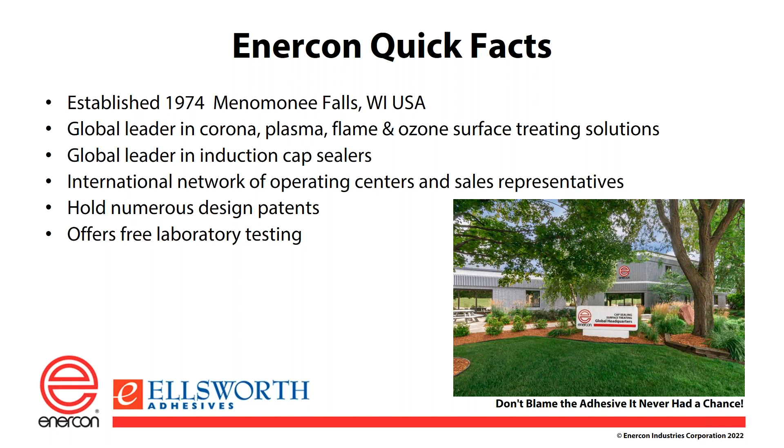Now I'll hand the presentation over to Don, who will tell us a little bit about Resin Lab, and then Bonnie will get the presentation started with the principles and fundamentals of adhesion.

Well, good morning. My name is Don Giroux. I work in product development for Resin Lab. I work in Dr. Bonnie Ludwig's group. And I'm going to tell you a little bit about Resin Lab. Resin Lab is part of the Ellsworth family of companies, and we have this specific responsibility towards the adhesive distribution group to provide technical support.

In the late 1980s, Ellsworth was a growing concern who had a very capable group of science or technical related people in their sales force, but they had a deficiency. They had very little experience relative to the chemistries of the products they were selling. So they went out and they found a talented young chemist by the name of Paul Tien. They brought him into their group. They gave him 1,000 square feet of space, 2 mixers and a technician, and I would argue that was the birth of Resin Lab. Now fast forward to today, we have over 106,000 square feet.

We have 50 plus employees. Dr. Bonnie Ludwig's group consists of a group of highly trained chemists, scientists, and technicians, and we have a state-of-the-art laboratory. But despite all this growth, we remain the same company that Paul Tien helped us start in the beginning, where we are responsible mostly for the technical support of the Ellsworth sales group and their customers.

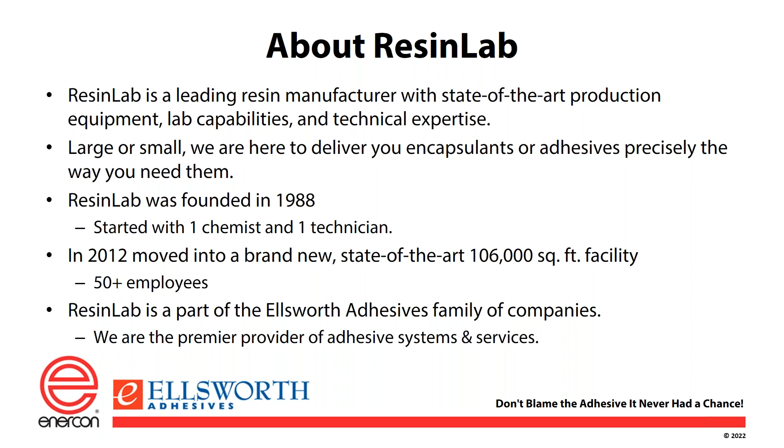Ellsworth, as an organization, has a commitment to quality. We have systems in place to hold us accountable to that commitment, and systems in place to organize our documents and our work. We also have a culture of continuous improvement, and we take that very seriously.

Resin Lab services are focused mainly on custom formulations. A customer would come in with a specific need, and we would create a formula that works exactly how it needs to in their application. We also do modifications of our own and other companies' products, something as simple as a change in color or adding spacer beads, to things that are more complex. We do toll blending, where a customer comes in with their own formula and uses our facilities to manufacture that product. And inside our building, we have custom packaging as well.

Moving on to the principles of adhesion.

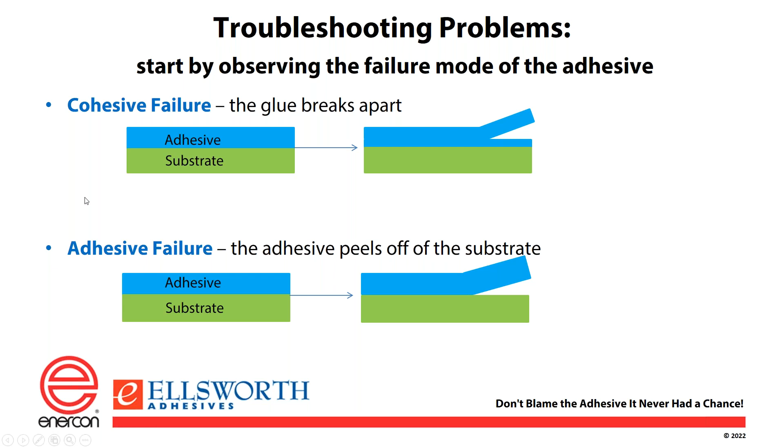As you go through the process of selecting an adhesive, you want to think holistically about your application, how you want your process to work, how you're going to take that adhesive and convert it from a liquid format to a solid format, and what you want those properties to be after it's hardened and in your application as an adhesive. Sometimes when we work with customers, they're really focused on the post-cure piece, which is the performance in the application. Really, the process pieces are just as important as the performance in the application, and include concerns in terms of how fast your process is going to work, health and safety, and convenience for your operators.

We're going to talk a little bit about common chemistries of adhesives, and this is going to be rather brief. We've got one slide that shows a whole bunch of stuff, and what I want you to take away from this slide is that there are really three main components. The first is to look at your substrates, that's your symbol key over on the left. Directly below that, we have characteristics, so how does the adhesive behave before cure, during cure, and after cure? And then over on the right, we have some typical adhesive types.

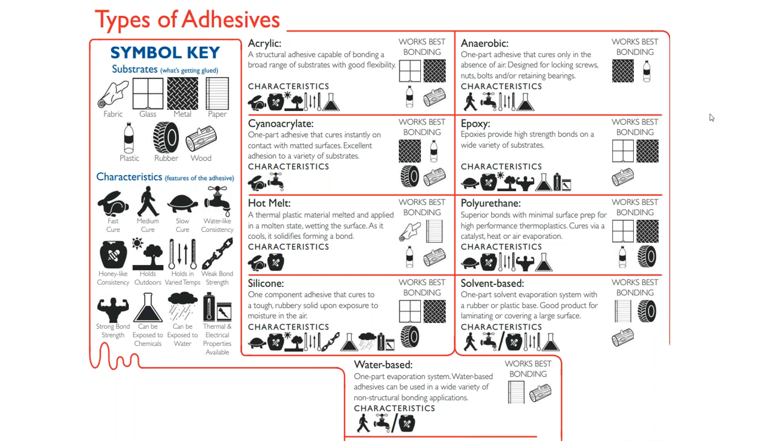Moving on to what adhesive failures reveal. Your first step is to examine the mode of failure. You may remember from a previous slide, we have two main modes of failure: adhesive failure and cohesive failure.

In adhesive failure, the adhesive will separate cleanly from the substrate. So the adhesive itself is intact, but it is no longer stuck to the thing you tried to glue it to. In that case, the bond between the substrate and the adhesive needs to be improved.

For cohesive failure, the adhesive itself breaks apart, but it does remain bonded to the substrate. In that case, the adhesive type may need to be changed, chosen to be stronger or tougher or more elastic, depending on how much strength you need in that bond.

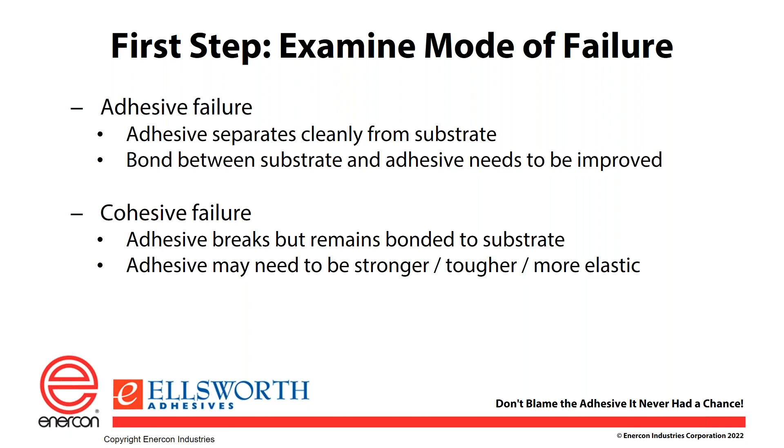If your failure mode is cohesive, that means your adhesive doesn't have the needed mechanical properties for your assembly to do what it needs to do. You may need to modify the hardness, flexibility, elasticity, strength, toughness, and more. You may also have had an issue applying the material, such as not mixing a two-part system properly, or not applying enough energy or time to allow it to harden completely.

Another common reason for cohesive failure is that the adhesive itself is fine, but the environment of use creates changes to the material, such as wide swings in temperature, pressure, humidity, moisture, contact with water, or other chemicals. For instance, in an automotive application, the material may be subject to greases, fuel, or UV exposure. Depending on the adhesive you choose, all of these may compromise its performance. So up front, you want to know the environment of use and select the adhesive based on how robust it needs to be.

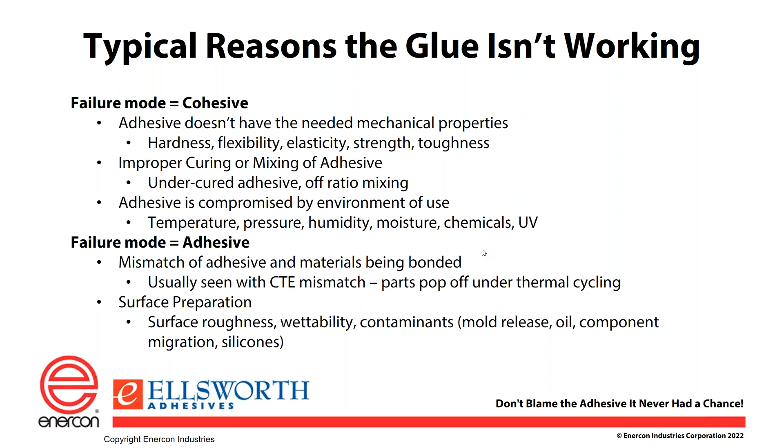If you want to try to predict how your adhesive will perform, you can do some adhesion testing. Typical adhesive tests are lap shear testing, pictured to the right, where two parts are bonded together with a half-inch overlap and pulled apart by a universal tester, giving you a force in pounds per square inch. You can choose the substrate base to match your assembly and predict both the strength of the bond and the typical mode of failure. Other tests exist, even more beyond what's on this list.

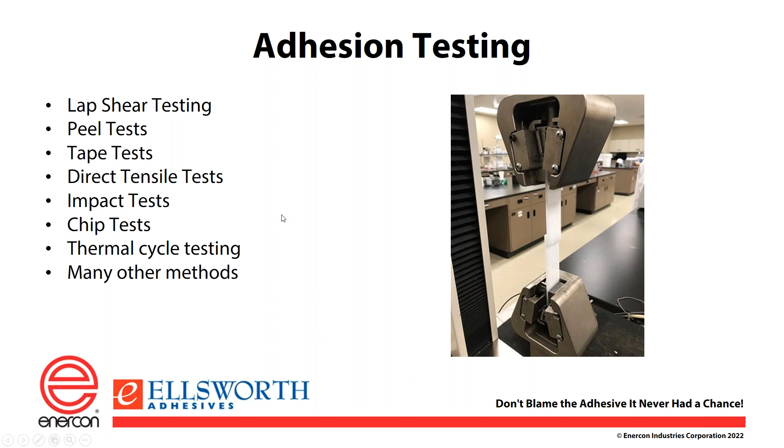Adhesion testing isn't a cure-all. It will be predictive of performance, but ultimately what your assembly is made of, how it is put together, and how you use it need to be examined to ensure that your adhesive choice and process are the best choice to get the performance you need.

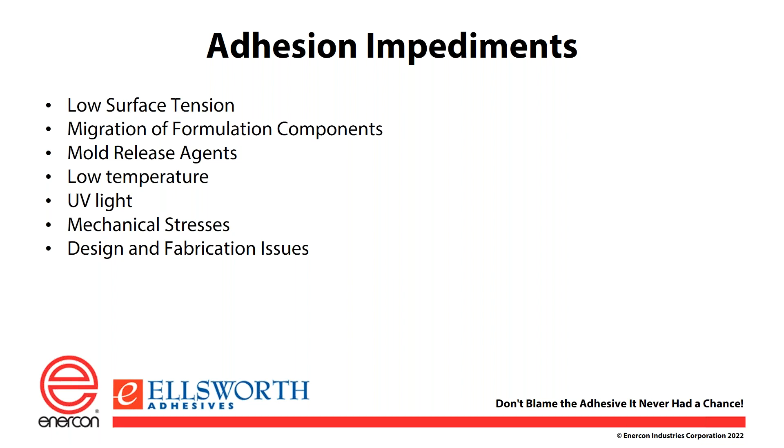So what causes some adhesion impediments? Low surface energy or tension. There might be migrations or formulations in the material itself—for instance, a plastic may have a flame retardant added to make it safer, but that will damage or limit your ability to bond to it. There may also be release agents on the surface, and other things like light, temperature, and mechanical stresses can all be impediments to adhesion and cause you to have a surface that's not easy to bond to.

What we're looking at here is a graphical representation of a low surface energy, hydrophobic surface. Hydrophobic means water-fearing, so it's repelling water on the surface, or in this case it may be an adhesive. Again, you might have low surface energy plastics in general, or low surface energy materials. That means they have limited bonding sites. There might be contamination, and there's additives that you see there that might be migrating to the surface and causing a problem, making it harder to bond to.

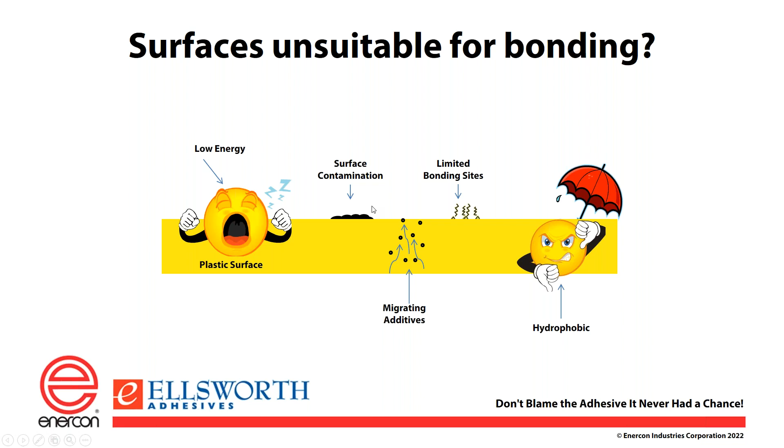So after our treatment, on the next slide, hopefully we have a much higher surface energy. We'll go over that in a few minutes. We've removed contamination that increased the bond sites, and we've taken the additives away from the surface. We've gone from a hydrophobic surface to a hydrophilic surface, and that is a much better prepared surface with which to bond.

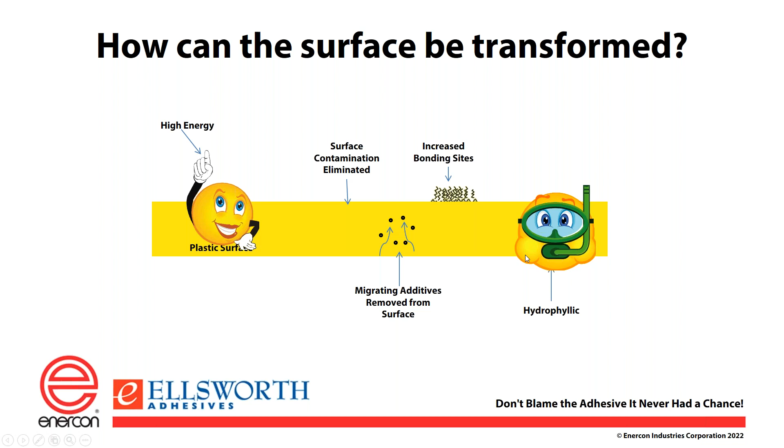So there are a lot of options to prep the surface, and this is mostly what I do every day. Someone's calling in, they're already doing something. They may be using primers, they may be etching the surface somehow with a chemical or mechanical preparation, sanding or ablation or something. They may be using vacuum plasma, other types of plasma, or flame. What we're trying to do in each of these situations is figure out the best way to prep the surface. As in the industry slide that Bonnie showed, almost everybody uses adhesives, and almost everybody uses some sort of surface preparation because they've determined it's important to have a good, repeatable surface if you're going to get good final products.

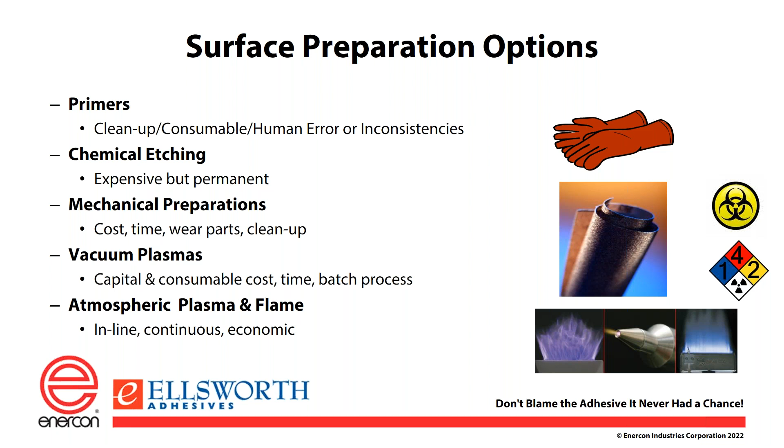Many times the first three of these - mechanical preparation, etching, and primers - are all done by hand in some form or fashion, so that's less repeatable. Your standard deviation in the final product goes up. You have some poor product designs, some failures in the field. If you move to a plasma or flame type pre-treatment, you can predict more accurately what's going to happen after you do the bond.

So here is our plasma. Plasma is just the fourth state of matter - solid, liquid, gas, plasma - and plasma is just the ionized form of the gas. We typically use compressed air, so you're going to have ions of nitrogen, hydrogen, oxygen, and then combinations of OH and things like that attacking your surface.

And it comes in three different forms. The one on the left, the blown ion, is what most people think of when they think of plasma. It does look like a candle flame, but that's just the UV light coming out. We use that to get down into crevices like that, we use it for bonding lines, and you use it to treat a lot of different things.

It can work on pretty much any material. The blown arc in the middle has to be used on non-conductive materials. Now that's about a 3.5-inch wide head, so it's treating a larger area, but you're generally going a little bit slower, on the order of maybe 10 to 15 feet per minute, whereas the blown ion can go much faster, maybe 100 feet a minute.

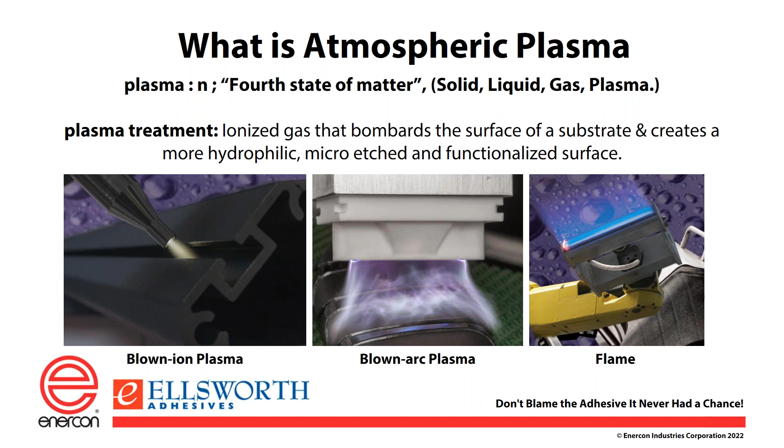And then we have flame. Flame gives you the ability to go much wider, more economically. It also gives you a little bit more area with which to treat. By that I mean multi-dimensional surfaces are usually better for a flame treater, just because I don't have to be as accurate with my distance to the surface as I do with plasma. Plasma is very much dependent on the speed at which you're treating and the distance from the surface, and the ion density you're going to get is related to both of those. Flame gives you a much larger area with which to do that, and with a multidimensional surface like maybe a Coke bottle, trying to treat the side of that, you're going to be different distances away. So we go to flame when we do this.

So what does plasma actually do to the surface? Three things: it cleans the surface. Now, the one that's not mentioned here is once you treat something, it takes the static off the surface, so anything like dust or anything being held on by static will go away - it kind of gets blown off just by the pressure of the air. But it also can remove organic and a few inorganic materials.

You see there on the left, material comes in dirty and it goes through the plasma, and the plasma will clean those organics off. Now some of the inorganics are a little bit harder to clean, so it may take a pre-treatment step for those. But again, it does a good job cleaning those surfaces.

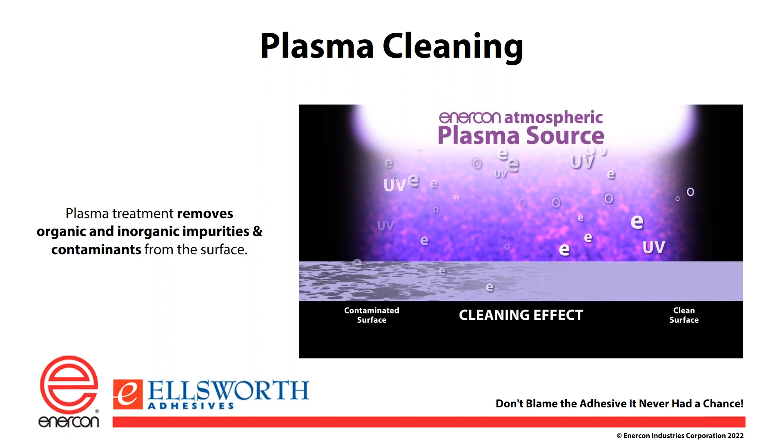The second thing plasma does is etch the surface. This is a micro etch, on the scale of 5 to 30 nanometers. Your manufactured surface comes in on the left, goes through the plasma stream, and we etch that surface. You can't see this with the naked eye, but we're increasing the bondable area by about 30%. One of the things you need to do to get a better bond is increase the surface area for the adhesives to stick to. So this is the second thing plasma does to increase bond strength.

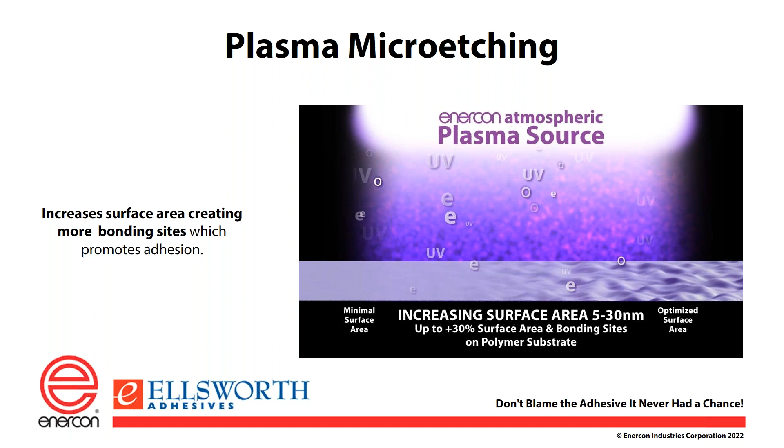Lastly, on the next slide we're going to talk about functionalization, which is increasing the polar groups on the surface. This is a bit more complicated. We're actually changing the outermost molecular layers and adding polar functional groups like O2 groups and OH groups, which increases the surface energy.

I mentioned before that if you Rain-X your windshield or wax your car, what you're really doing is decreasing the surface energy, so water will just roll off and it'll be easier to see, or your car will stay clean. What we're trying to do when bonding is increase that surface energy. Surface energy is basically related to the strength of the bonds holding the molecules together.

If I have a block of polypropylene and I try to cut through it, all I'm really doing is cutting the bonds, and that's pretty easy because plastics have low surface energies. If I've got a block of titanium and try to cut it, the bonds between the titanium atoms are much stronger, so the surface energy is higher. So we have to look at that starting surface energy to see what ability you're going to have to bond to it. Once you plasma or flame treat it, we're hoping to increase that by increasing the polar groups on the surface. Once the bond is made, that's a permanent bond.

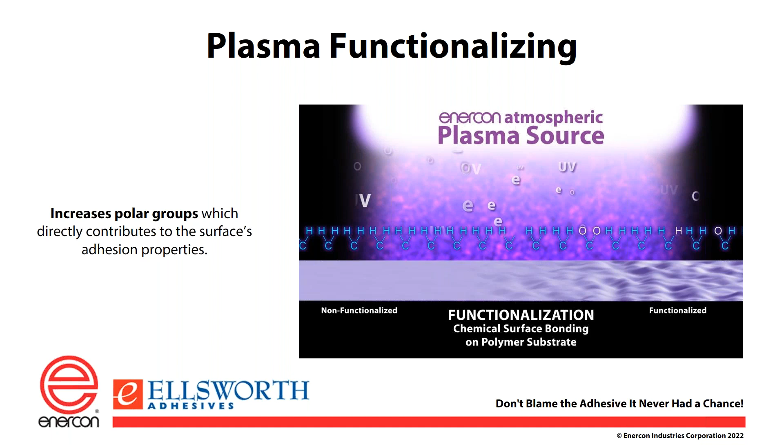So how do we test it? We use dyne solutions and contact angle. When I do dyne, the higher the dyne level, the higher the surface energy. In general, this isn't 100%, but generally the higher the surface energy, the better your ability to bond to a surface.

So if you're using this in manufacturing, you may have decided in engineering trials that you need at least 50 dyne to get a good bond, and so you would run that test.

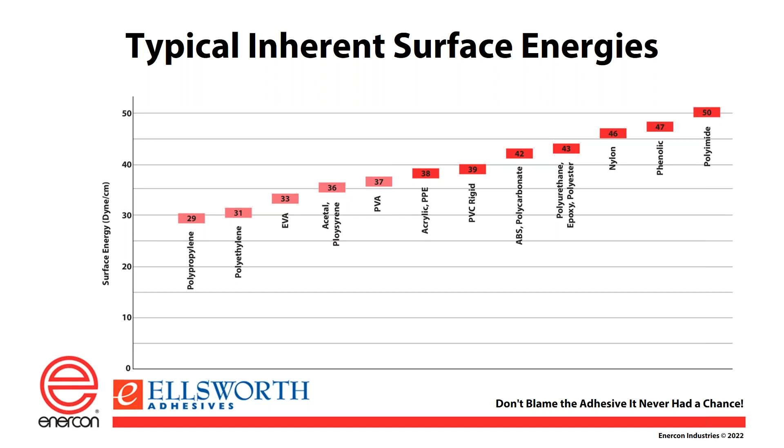I'm not going to go through this slide. I want this to be in the presentation so you can look at it. But what this is showing is how you treat things differently with flame and blown ion and the different results that you get. So the first line is polypropylene.

It started out untreated about 30 dyne. Once you treated it with the blown ion, it went up to 58 dyne. But the flame treater in this case did better. It went to 70 dyne.

So this is one of the things that we take into account when we try to recommend a solution for you if you're having an issue. Sometimes the material just reacts better to one form of treatment versus another.

Sometimes we have to look at the form of the material because, again, if I'm only treating a few square inches and I have 20 minutes to do it, well, I've got lots of solutions there. But if I'm trying to treat a few square meters or a few square feet and I've only got a couple of seconds, well, that's going to limit the number of applications that I can do.

So we look at this to try to figure out what is the best way to treat it. But many times it's the actual form of the material that we're treating that decides what we're going to try to do.

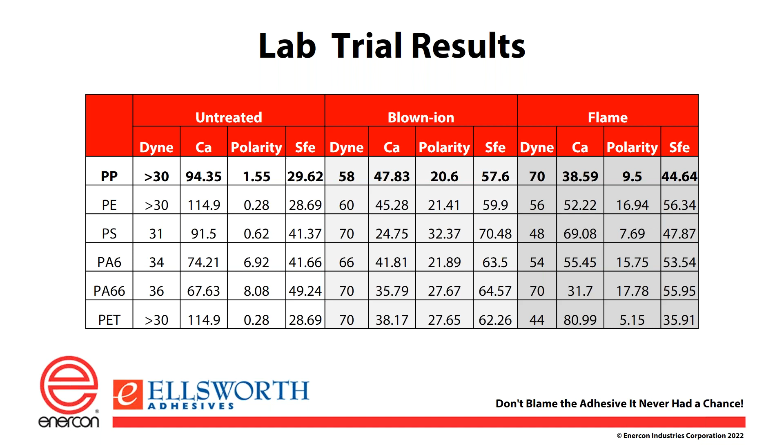This was a lab test that we did with a polyethylene with a UV cured adhesive. After 24 hours, you can see that the bond strength more than tripled from our control using both the blown ion, which is the plasma, and the flame plasma. This happened to be a Henkel adhesive that we used in the control test. This is just kind of showing you the difference in bond strength that you'll get after treatment.

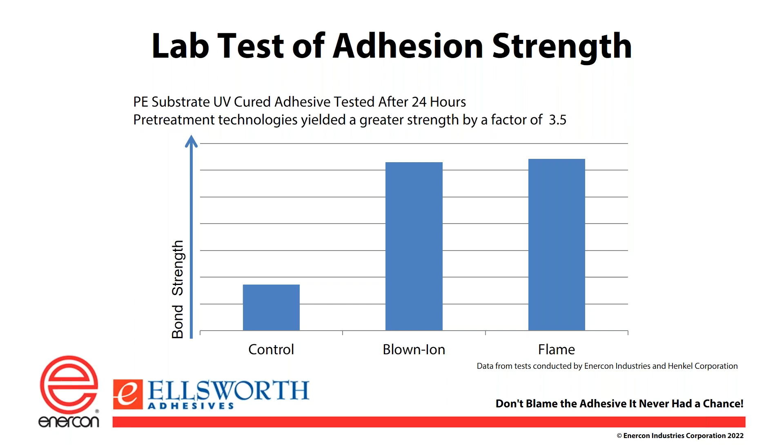So now let's look at the effectiveness. How do we figure out the effectiveness of the treatment?

Here, again, I think Bonnie mentioned this as well. Just doing the test in our lab or in ResinLab is not going to be sufficient. We really need to do the test at your facility and run these with your materials and everything. We use dyne and contact angle to show the difference in surface energy after our treatment, but it's really just an indication of where we're at. We really need to run the trials and run the tests at your facility.

We get asked a lot, mostly by aerospace, how do I know that I've got a good bond without breaking it? And the way we do that is try to control as many things in the process as we can before it comes into our system and then out of our system.

So by that I mean, I can predict with pretty good, well, with a very low standard deviation of error, how something is going to come out of my flame or my plasma system if I know the material that goes in. So we have to monitor each of those steps and know where we're at, know how clean the material is, know what the surface energy of the material is, and all of those things, and then know what level of surface energy we need for a good bond to come out on the other side and have a good part. So that's how we try to control each of those steps.

But again, it is very important to do this in your facility with your materials, with your production, and then we can determine or help you determine what level you need and what level of treatment you need.

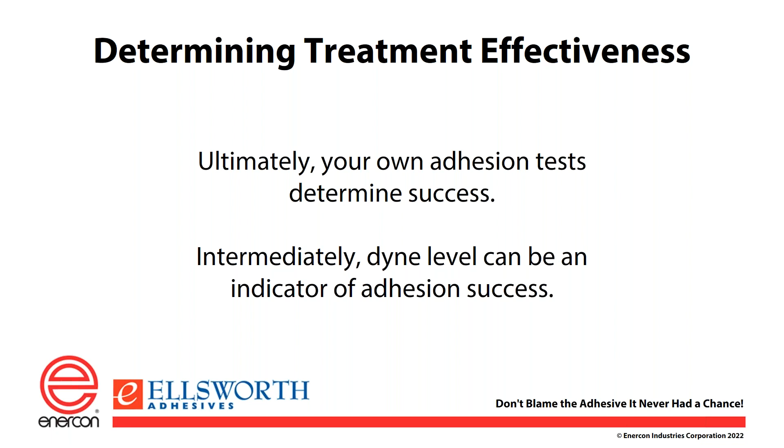The other question that gets asked all the time is how long does the treatment last? This could be from hours or actually seconds in the case of fluoropolymers which don't treat very well, to several months. We do have some batch applications, not very many, where somebody treats a part and then puts it in a batch and prints on it or something later.

That can happen if you only need a slight increase in surface energy, but it's not optimal. You're creating a highly active part, so we always recommend that you do whatever the next process step is, in this case bonding it, as soon as possible after the treatment. It leaves the least room for mistakes and things to happen.

So you want to do that as quickly as possible, but technically you can have 2 to 3 to 4 days before the treatment goes down. We do measure that, and we can send you samples at different levels, and then you can test those levels and say, okay, we need above 59 or 69 or 49 or whatever it is in order to make the part that we're looking to make, and then we can work with you on how to do that repeatedly.

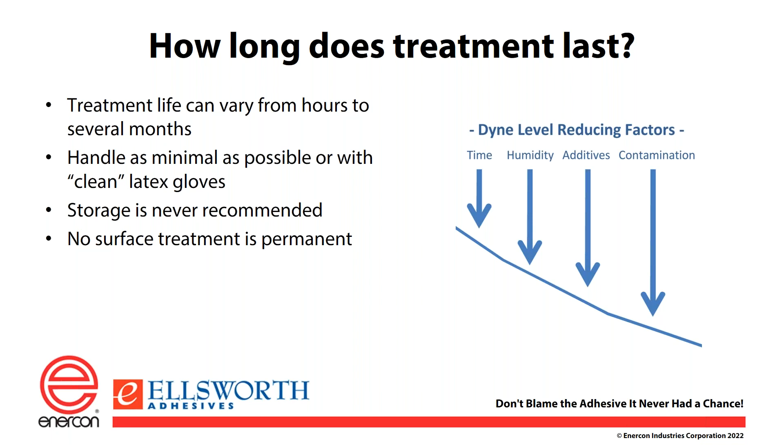So let's look at a couple of applications. This was a case study that we did with ResinLab. We were using high density polyethylene in a clear ResinLab adhesive. We put these together and then we did a pull test on it.

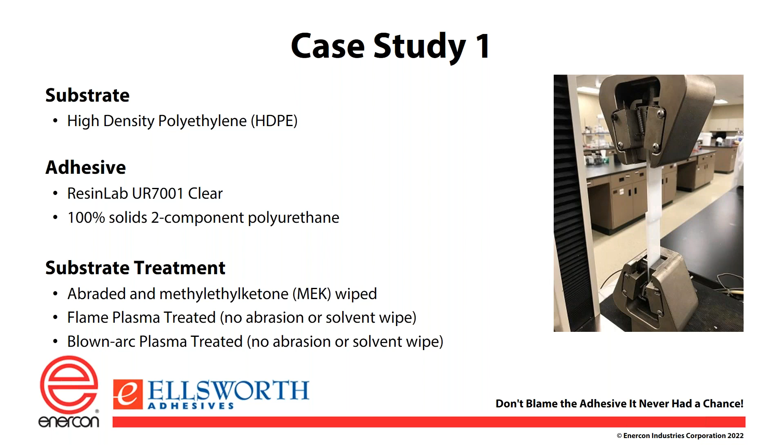We did some treatment. We cleaned it first, and then we tried the plasma treatment and then the blown arc treatment, the flame plasma and the blown arc treatment, to see what gave us the best results. The one sample that was not treated was just cleaned first, and then we did the flame and the blown arc without cleaning it.

Initial dyne level for both was 33, and you can see that we got the same 69 after treatment. That's a nice delta there, and a good repeatable number that you can use.

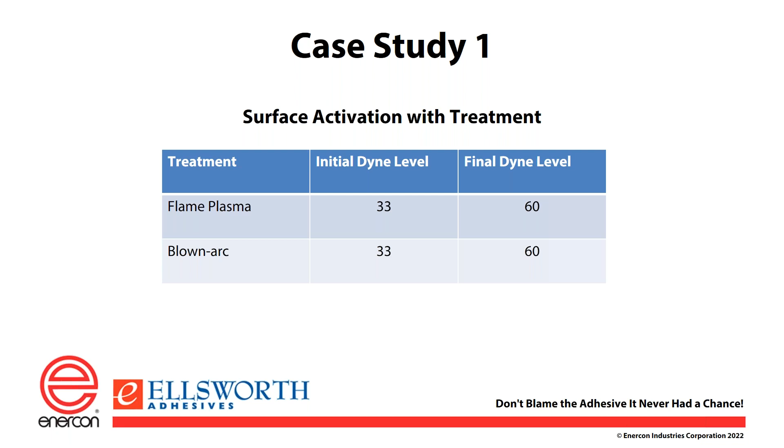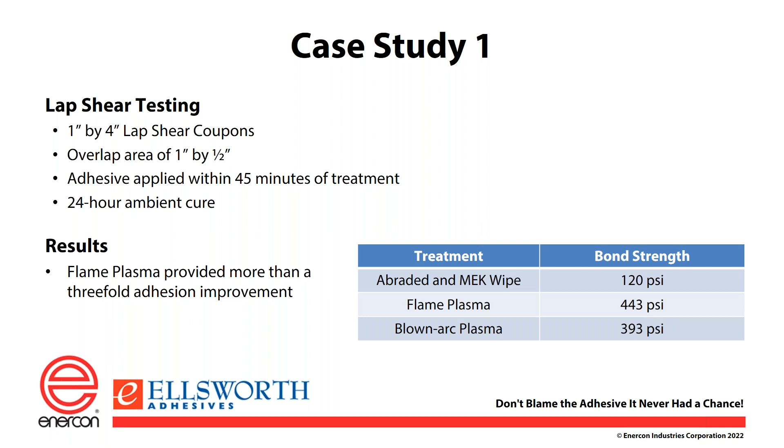You're increasing the energy on the surface, and you're going to get a better bond.

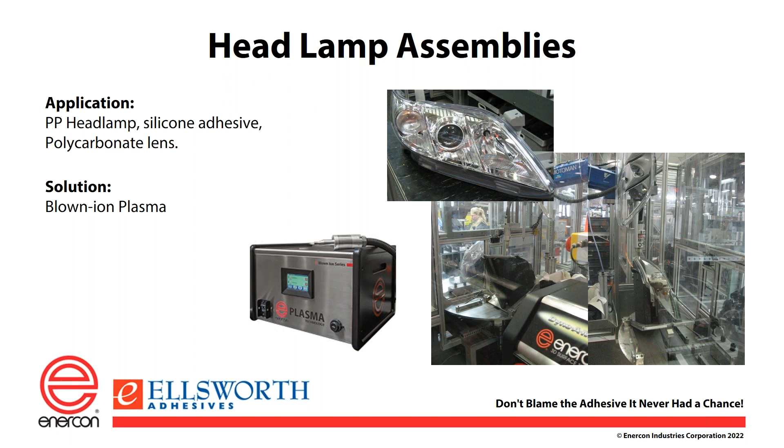Some other applications we've gotten into in the past: the headlamp is probably the original plasma application. Many older cars, you could see those headlamps fill up with water because they weren't sealed very well, until they started using plasma to treat the polycarbonate lens and the housing, which is polypropylene, treating inside that gap. You put the adhesive in there, and once you seal it, you've got a good solid seal. You very rarely see headlamps filled up with water these days because of a poor seal. This is just an example of what plasma can do to increase bond strength.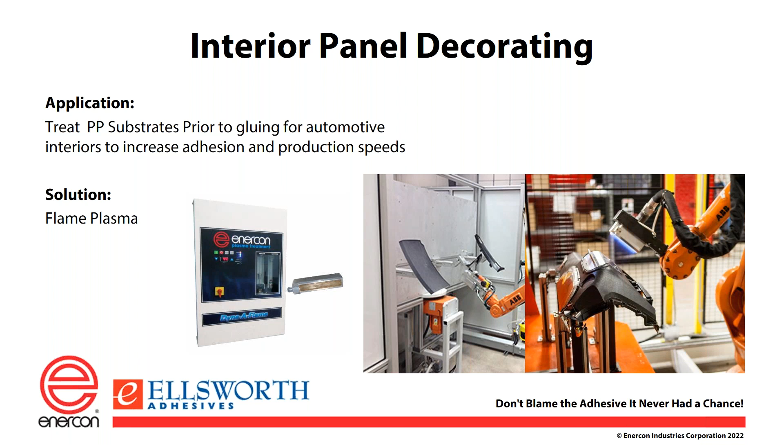And then of course you see the door panel a little bit to the left of that. This is the flame solution, but then they would put the adhesive on and whatever decorative coating you're going to have in that type of vehicle. That's usually a polypropylene, or sometimes it's a fiberglass dash or door panel.

We do a lot of potting applications too for outdoor electronic circuits. Going back to the headlamp assembly, each one of those headlamp assemblies also has an electrical circuit that is potted in a very similar way. It can be treated with plasma or flame. Flame is usually faster and gets into cracks and crevices a bit better than plasma, but plasma is also used in this application. What we're doing is trying to increase the surface energy of all those different components on that circuit board and the shell itself, so that the epoxy sticks and you don't have a failure route where water can get into the circuit and destroy it.

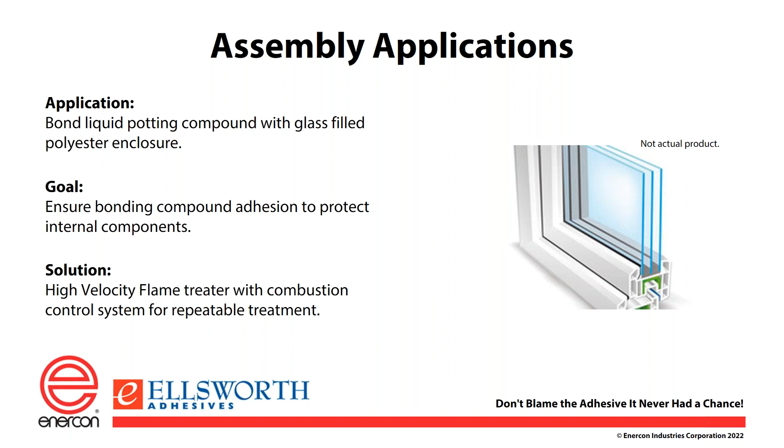Another application for bonding - there's lots of applications here, but this is a window and door application. There's about 8 different bonding applications in this part. Sometimes we're bonding frame to frame, sometimes glass to frame, sometimes plastic to frame. So there's a lot of different applications here, and we use a lot of different nozzles with the blown ion to get down into some of those highly intricate pieces. You can see the side profile of that particular glass or window. There's always a very unique profile depending on the manufacturer, so sometimes you have to create different manufacturing tools to get down in there. But again, this is another good bonding application. You're usually using PVC or some other plastic for the window, which is again low surface energy, so treatment is necessary to get a good bond.

And customizing materials for successful adhesion.

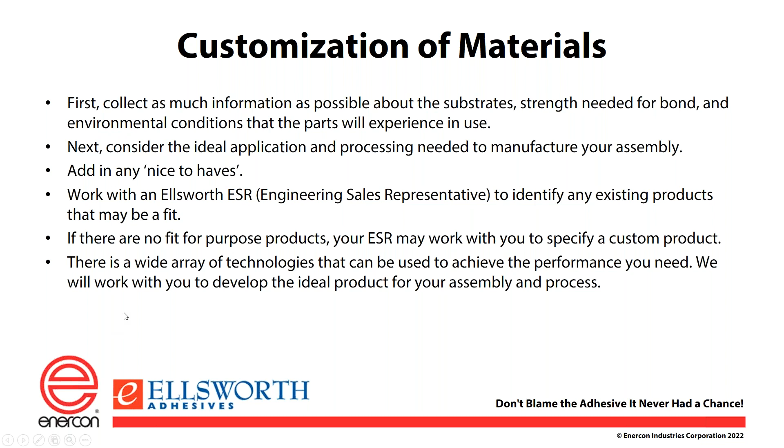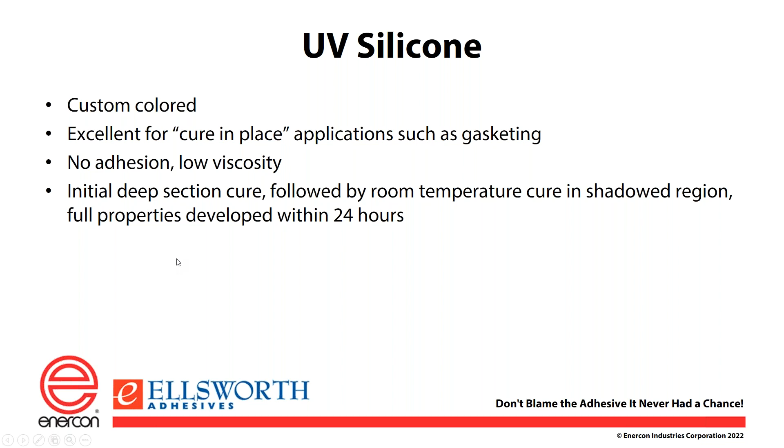10 unique products, I hope it's 10. In any case, UV silicone - kind of unique product. It was a gasketing type of application, I believe. It needed to be dispensed onto a plastic substrate, and exposed locations would be hit with UV light to immobilize it so that the device could be moved down the production line. Condensation cure continues in dark sections, and within 24 hours there's a complete cure. A little unusual product, but a very good one. It's also a pretty color - I think that's an important thing to note.

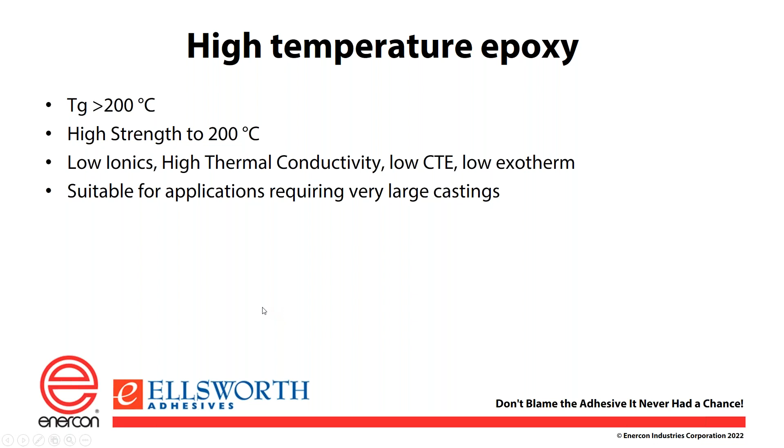Next slide please - high temperature epoxies. This is a blast from the past in the sense that when I first got into this business, a lot of people needed high temperature epoxies, mostly because people weren't particularly good at thermal management. But today that's not a very common thing, and yet we've been asked to make a product that is very high in temperature capabilities, with a TG in excess of 200 degrees C. It maintains great compression and bond strengths up to 200 degrees C, low ionics, high thermal conductivity, low coefficient of thermal expansion, and is suitable for very large castings because with a very low exotherm, it's a slow reaction. It's only unique because it's just not done that often these days.

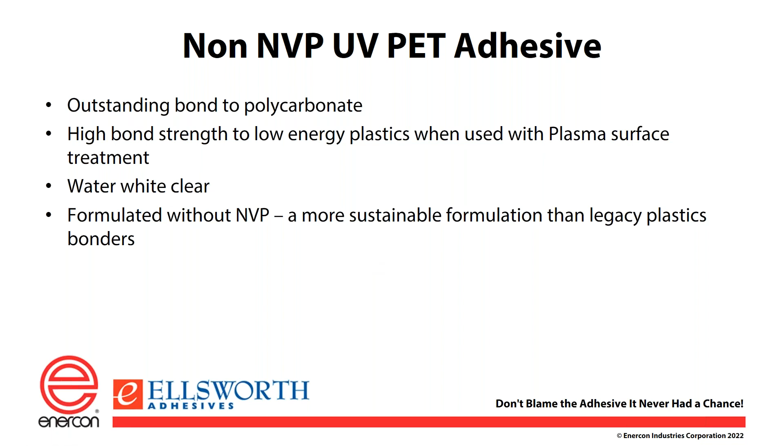High thermal conductivity silicones, in excess of 1 watt per meter K with low viscosity, would usually be of value in applications associated with battery packaging along those lines, but it's a very good thermally conductive material.

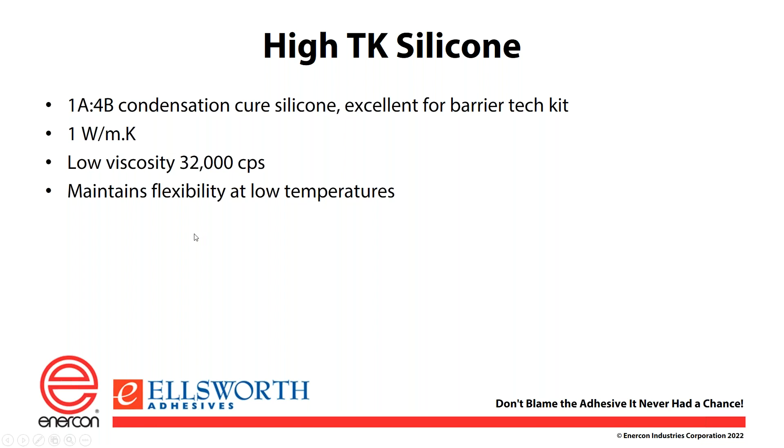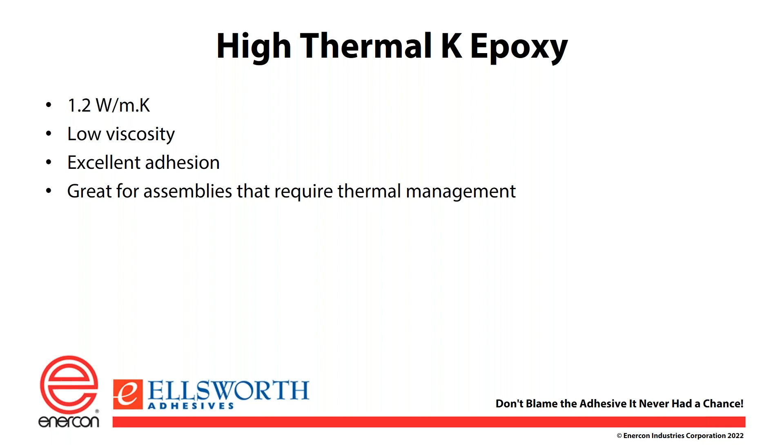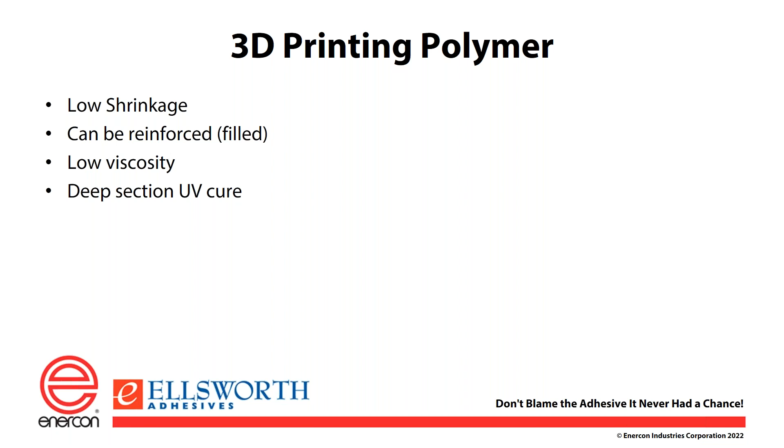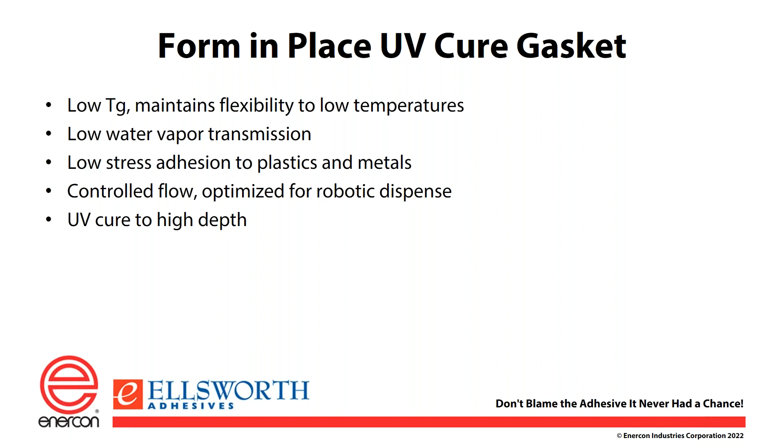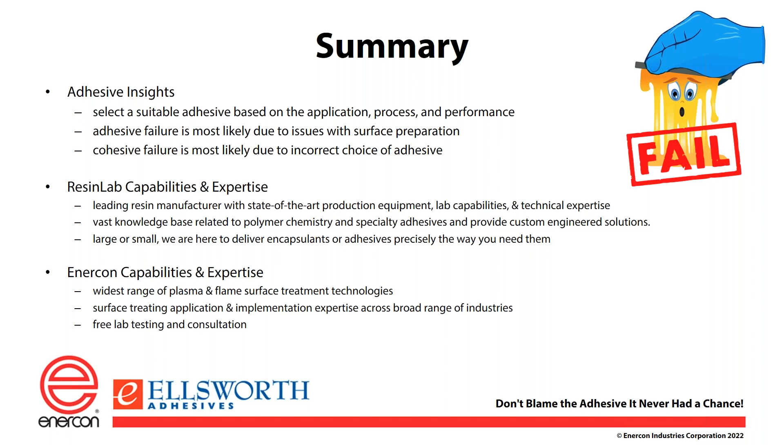Always remember to select a suitable adhesive based on the application, process, and performance specifications. Know that adhesive failure is most likely due to issues with surface preparation, and cohesive failure is most likely due to the incorrect choice of adhesive. The ResinLab team is here to help you with challenging projects when commercially available products do not meet your application needs. The team's experience, lab capabilities, and ability to create custom engineered formulations offer a great resource for those projects. And when it comes to preparing a surface for adhesion, Wilson and his team at Enercon provide access to the industry's widest range of plasma and flame treating technologies. They also offer free lab trials in their facilities, as well as trials conducted at your facility, to determine the effectiveness of treatment for your application.